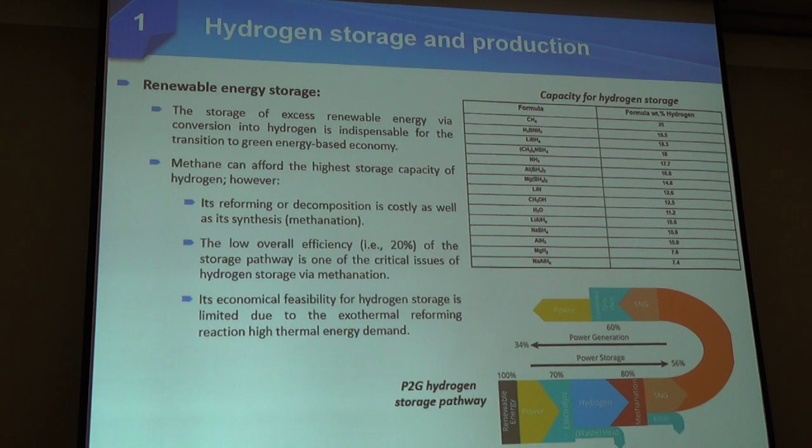So this leads us to talk about the heat supply methods for the steam methane reforming reaction. So the main used method is the external heating for steam methane reforming using the top-fired box or the furnace to supply heat. The second one is the autothermal steam methane reforming, which uses ignited combustion before the leading edge of the reforming catalyst. And the third case is the catalytic autothermal reactor, where we use a catalyst for the combustion followed directly by a catalyst for reforming. So of these cases, the first one is the most used method for heating.

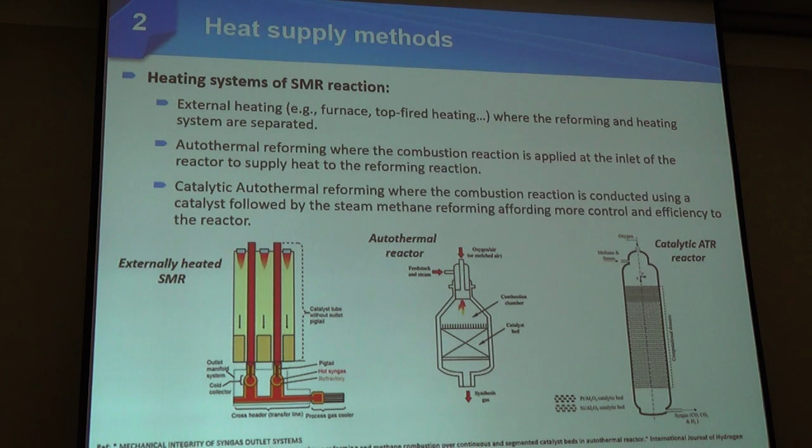So in our study, we have proposed a model for steam methane reforming using annular catalyst autothermal reforming. So the catalyst was implemented as multi-concentric rings in the reactor, alternating between the reforming and the combustion catalysts. And also we have modeled the conventional catalytic autothermal reformer for comparison's sake.

So the main difference is for the annular catalyst we have used more combustion catalyst because of the length of the reactor, which is 1 meter. And this leads obviously to a higher volume ratio. And also we have used 4 catalyst layers for the combustion, while the remaining is for the reforming catalyst.

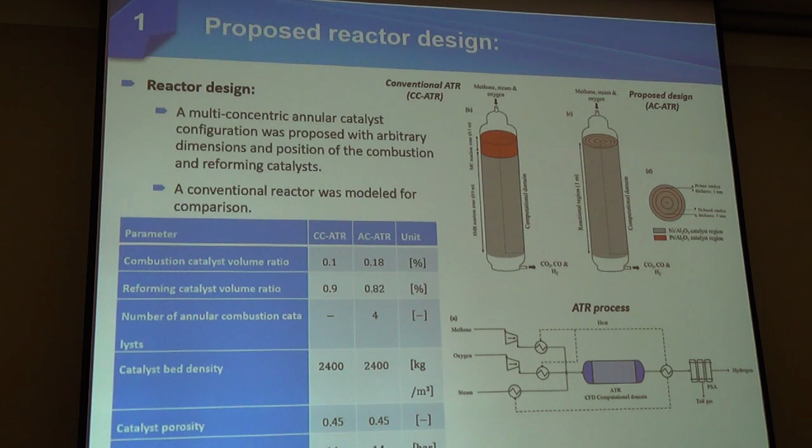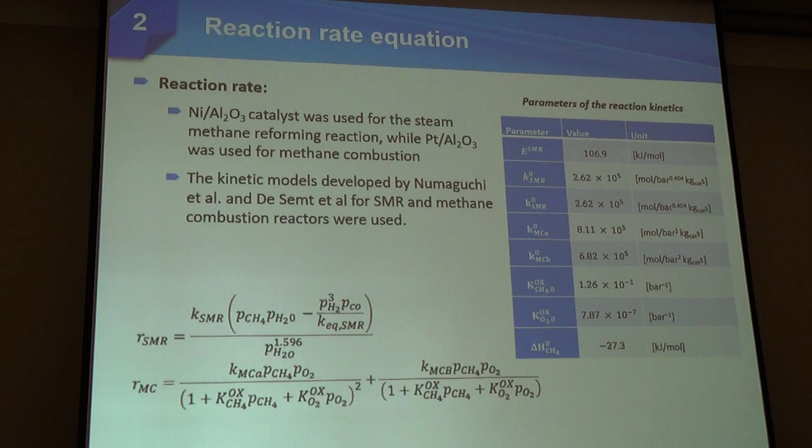So for modeling this reaction, we have implemented a kinetic model that was developed by Numaguchi et al. for steam methane reforming and De Semt et al. for the combustion reaction. The catalysts used for these 2 reactions are nickel and platinum for reforming and combustion respectively, and based on alumina.

So for the mathematical model, the governing equations, which are the continuity, momentum, energy and species equations were used. And for modeling the catalyst porous media, we have used the Darcy-Brinkman-Forchheimer model equations. For the catalyst, we also assumed it to be in thermal equilibrium with the fluid. For the resolution method, we used the finite volume method for the discretization of the partial differential equations, while for solving the velocity pressure field, we have used the SIMPLE algorithm.

So we have built a code using Fortran language for the CFD model, and we have used Python for the genetic algorithm code. For the computation resources, we have used 20 CPUs in parallel, and the calculation ran for around 3-4 days.

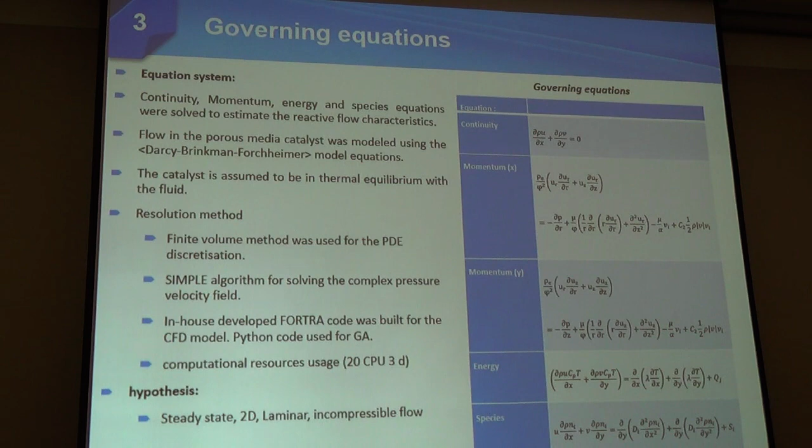So for the hypotheses, the main hypotheses were steady state, laminar and incompressible flow. For the boundary conditions, we have used uniform inlet velocity, temperature, and molar fractions. For the wall, we are using the no slip condition and the adiabatic impermeable wall. For the outlet, we have used the fully developed flow.

So for the validation of the model, we have compared the numerical model with the results of a study published by Chompupun et al. So as you can see, there is good agreement between the numerical and the experimental results with a maximum error of about 4%.

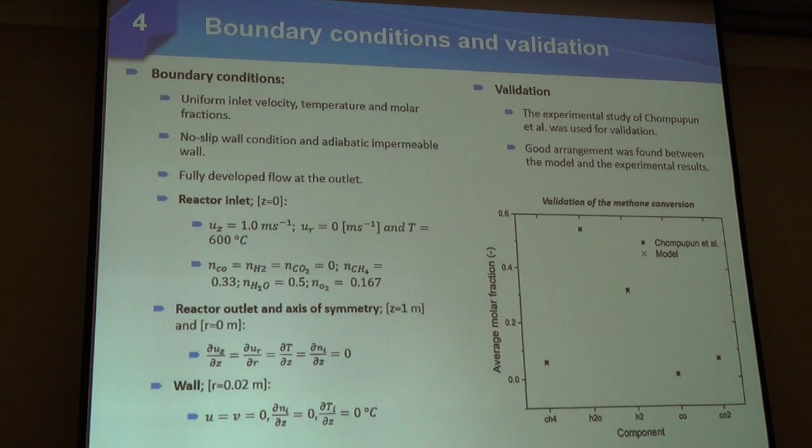So the objectives of the optimization are the higher yield and also the low temperature on the wall. For the latter objective, we have implemented it to avoid using over combustion catalyst. So we have used the wall temperature as a reference, also for the mechanical stability, and also to use lower cost wall materials. We have sought lower temperature on the wall.

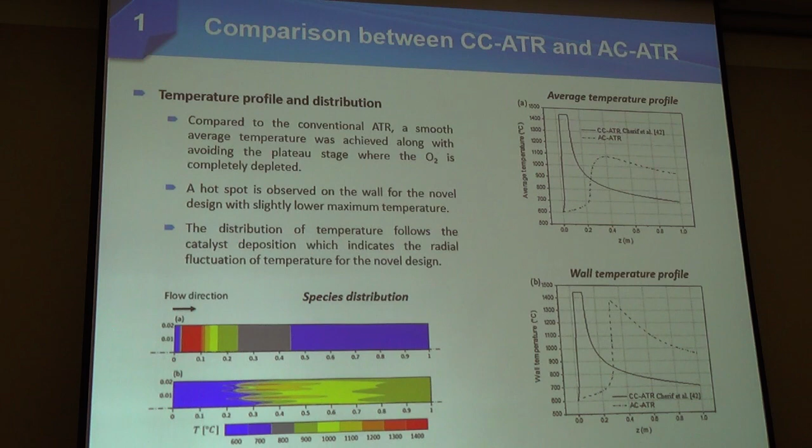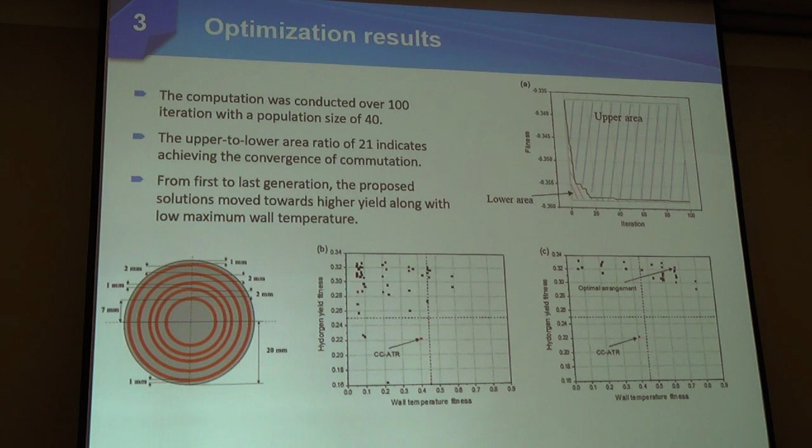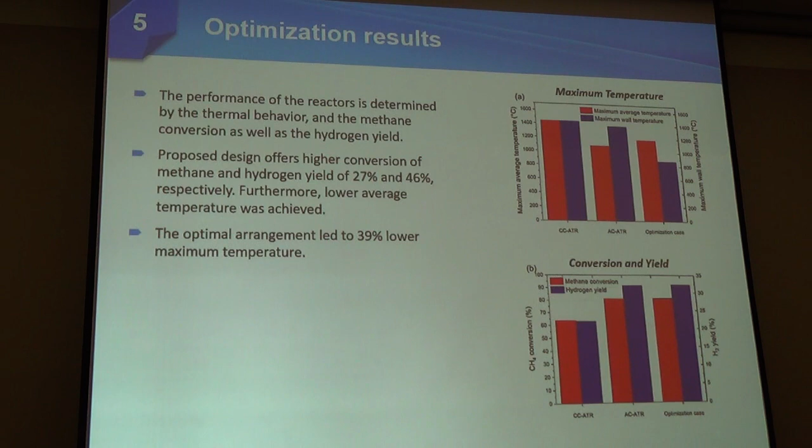So as a conclusion, we have proposed a new design and also a multi-objective optimization analysis for the distribution of the conducted design, implemented on nickel and platinum catalysts.

And also for the design case, a notable enhancement for methane conversion of 27% was observed compared to the conventional case, as well as a decrease of 24% in the highest average temperature, and a slight decrease in the maximum wall temperature was achieved. Also, some hotspots were still observed at the wall in the design case.

So, for avoiding this, we have implemented optimization. The optimal case was sought to limit this hotspot along with attaining high hydrogen yield. This latter was not significantly improved compared to the design case. However, the thermal behavior was strongly enhanced, and the optimal arrangement smoothens the wall temperature profile with 39% lower maximum value.

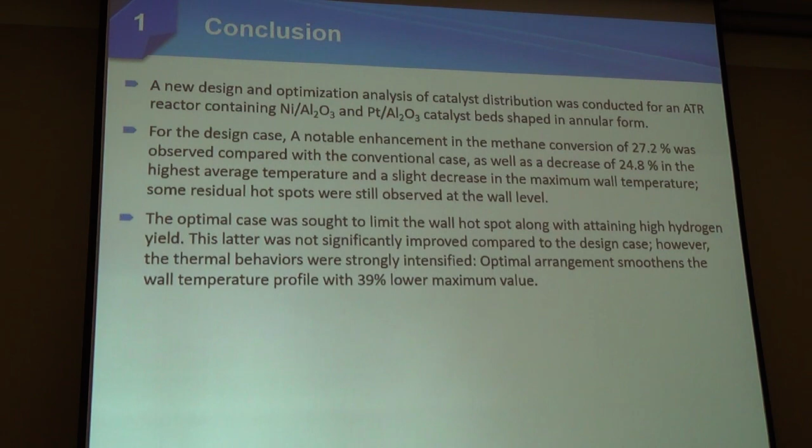So this work was published in Applied Thermal Engineering, under the title Novel Design and Multi-Objective Optimization of Autothermal Steam Reformer to Enhance Hydrogen Production and Thermal Management. The collaborators of this work are Chul-Jin Lee, Rachid Nebbali, and Professor Cherif.

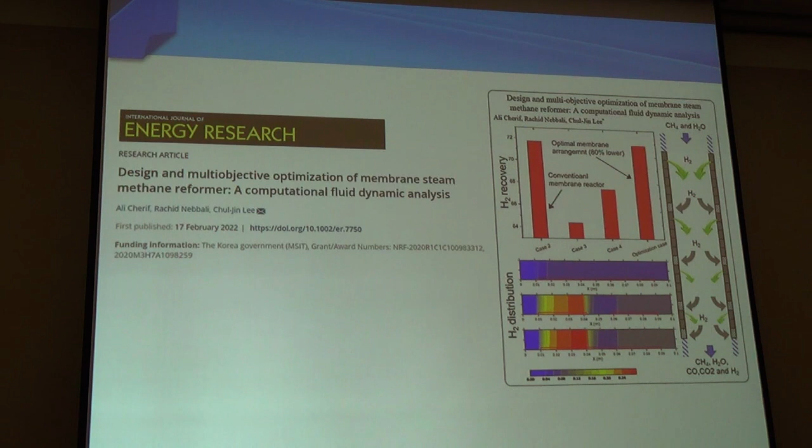So also we have implemented this idea in another paper, but focusing on the membrane steam methane reformer. We have done the same optimization strategy, but for membrane and catalyst alternating, and we have good results for this case too. It was the design and multi-objective optimization of a membrane steam methane reformer, a computational fluid dynamics analysis. So thank you so much.

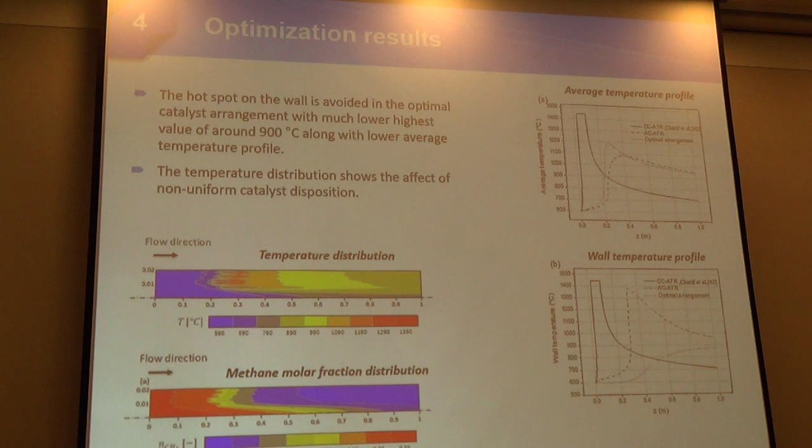Thank you. So for the model, it was 2D, and for the optimization, we have synchronized it; there is a procedure. First we set a random generation. Then for each element we conduct the calculation. It is calculated in parallel, because it takes some time. This is how it is. The CFD model and Python code were integrated.